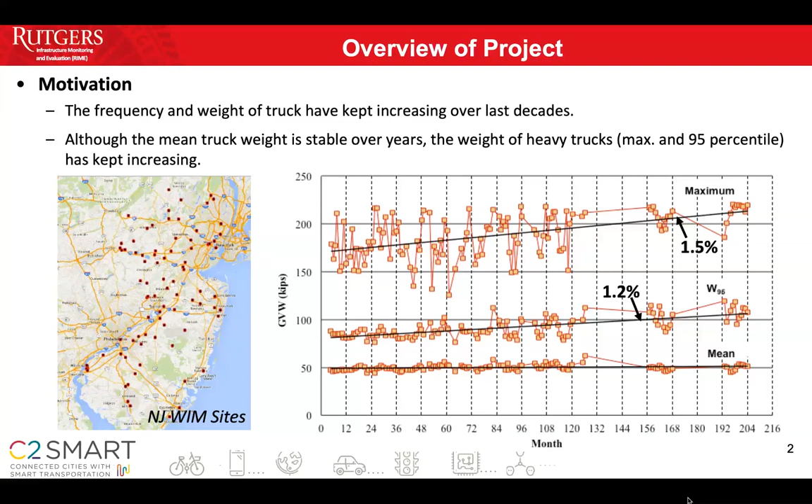The background of this project is that truck weight is important for the safety of people and cars. We have been collecting and processing WIM data in New Jersey over the last 10-20 years, and what we noticed is that the average weight of trucks is almost the same, as you see in the figure. The mean value is almost not increasing over the last couple of years, but the maximum value, or the 95th percentile of weight, is increasing over 1 or 1.5% every year. This is a lot, so we have to know how these overweight trucks are impacting our infrastructure.

Another thing is that overweight trucks are normally regulated by weighing stations. In New Jersey there are a couple of weighing stations, and the troopers try to enforce them weighing at the station. However, they have captured less than 1% of overweight trucks, but in reality, when we processed all the WIM data, we found that more than 6% of trucks are overweight. So there is a big gap between the actual overweight and what is being cited at the weighing station.

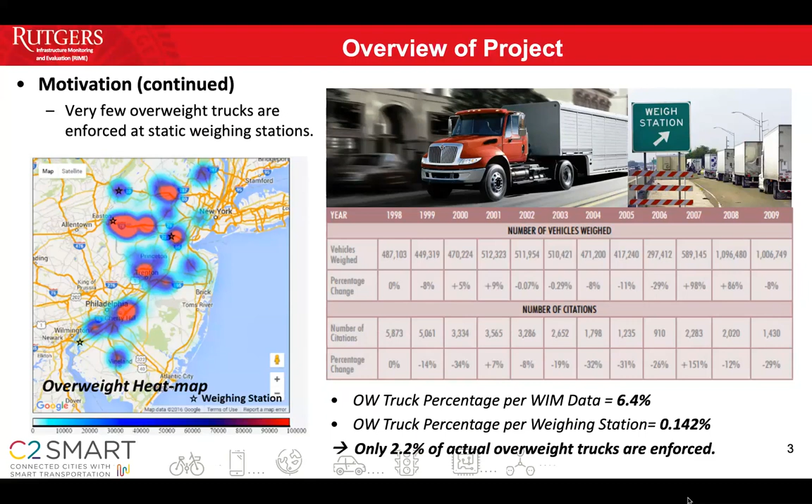For this study, we had previous work in New Jersey called the Impact of Freight Effect on Infrastructure in New Jersey. Based on that research, we expanded to New York City, and we are going to share those results in this presentation. First, Graziano will present one part of the research.

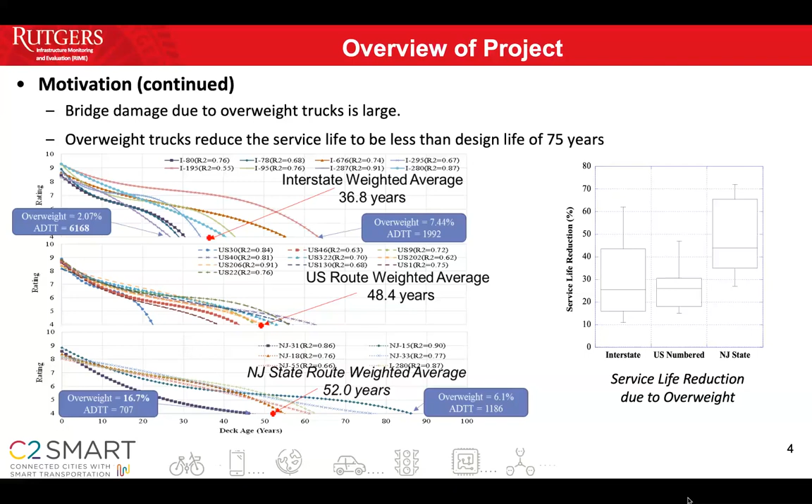Related to the impact of freight, generally there are two types of components that are analyzed: one related to roadways or pavements in structural terms, and bridges, the structural integrity of the bridge itself. For these two systems, there are different approaches because they are physically very different. For pavement, generally there are two approaches that can be used.

One is... I think there's some echo. Can you hear me well?

Related to this, the methodology was developed in the 60s, called ESAL, or Equivalent Single Axle Load. It's an empirical approach where the Federal Highway Administration created methods where they ran trucks over certain specific pavements and measured the effect of different loads on the pavement. Based on that, they created a regression, as you can see in that exponential curve, in order to quantify the effect based on the damage onto the pavement. This was a very simplistic approach, but because the physics of the pavement is very complex to model, that was the only way to provide a methodology for engineers to quantify load effect on pavements.

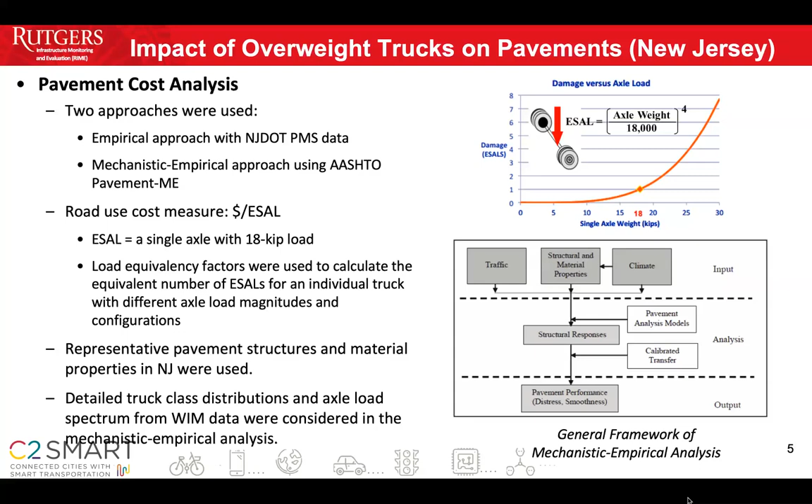In our case, we developed for the New Jersey project a method based on MEPDG, the Mechanistic Empirical Pavement Design Guide, that uses this information, as you can see in the lower chart, with traffic characteristics, material properties, and climate. With this information, we simulate, using the load, a response of the pavement package. Based on this performance, we measure the deflection, and this is used to quantify good or bad performance related to the service life.

When we have a model related to a single segment, we can try to extrapolate this effect all over the networks in the state, nationwide, related to roads and bridges.

In this case, we have a scenario where we analyze a specific segment of pavements related to certain paths. For each of these links, we know the characteristics of the pavement, and we quantify the ESAL. Based on the cost to repair the pavement and the cost related to the effect of the trucks, we can quantify how much it would cost to repair the pavement based on the characteristics of the actual trucks we see on the highway. We can do this when we know the effect, when we know where the trucks are traveling.

For instance, in New Jersey we have a database of trucks known to be overweight, which require a permit because by law you're required to ask for a permit if you know you're running overweight. Based on these characteristics, they store this information in the database. Using this data, we can quantify how many of these trucks are traveling on the network and what the effect is on a yearly and monthly basis.

We estimated a range based on the effect of these trucks on cost, between 2 almost 3 cents to 5 cents for interstate, and for state roads almost 10 cents to 50 cents. On average we have 4 cents and 25 cents.

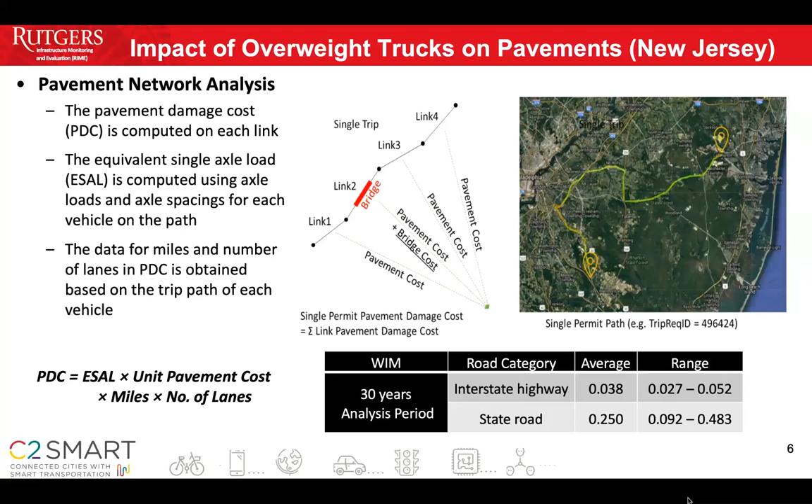To perform this analysis, we had to assume certain parameters because the pavement databases and cost information vary across the state. City by city and region by region we can have different cost information. Based on this, we collected what was available out there to evaluate the pavement cost damage.

What we developed in New Jersey, we tried to tie to New York City. Differently from New Jersey, in New York City there is no database of trucks where we can infer the patterns of these trucks. We don't know the weight related to overweight trucks unless we measure directly, since the DOT doesn't track this information yet. Because of that, it was more challenging to perform the same type of analysis in New York City.

So we tried to assume whatever would be similar between the two geographic regions. For example, New York City and New Jersey share the same environmental and climatic conditions, so those assumptions were fairly good relative to what we had in New Jersey.

For the trucks, we had to measure them in the city, and there are only about 3 sites where we could collect data, which is definitely not enough compared to New Jersey, where we have almost 90 WIM sites to collect truck traffic data. The pavement construction information is similar between New Jersey and New York City.

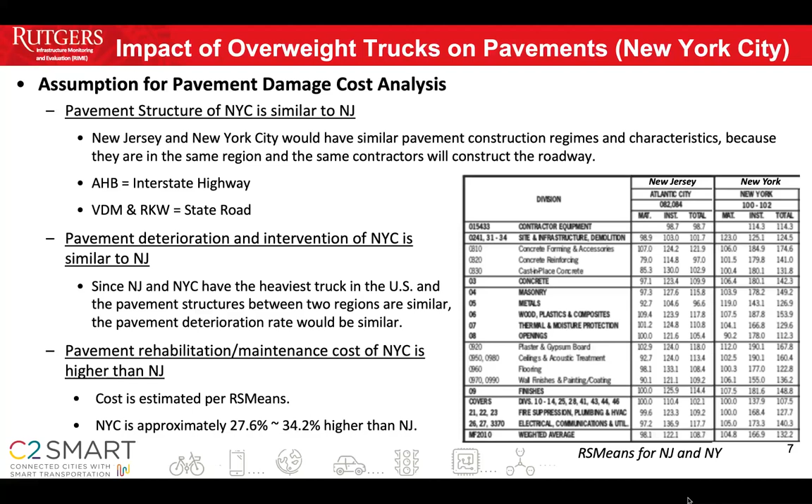For bridges, the effect is completely different, so the way we model bridges differs from pavement. We have a different physical model, a different mechanism of failure, mainly overstress or fatigue, tied to the effect of deterioration that generally tends to accelerate the risk or probability of failure related to either overstress or fatigue.

We have different types of bridges. The most common in the northeast United States are steel girder and concrete bridges, mainly steel multi-girders, though there are also different typologies for steel bridges. We clusterized this information according to their characteristics, and based on the statistics of the bridges, we analyzed a sample for each bridge type to come up with the deterioration profile for each component, like the superstructure, divided into deck and overall superstructure, and the substructure, which contains piers, abutments, and foundation.

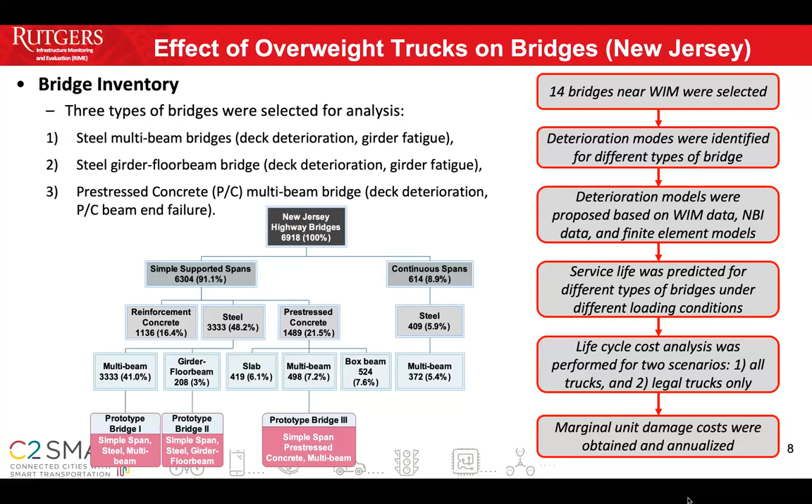And then we develop a methodology that tends to filter the data to perform, based on the statistics we have on the inventory of these bridges, deterioration profiles, so that over time tend to reduce the condition of bridges, and then we can extrapolate the behavior on the long term.

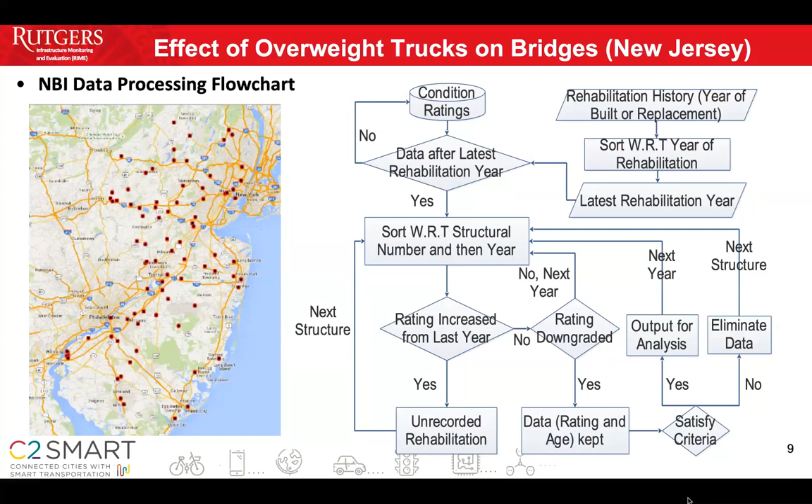And these are just examples of the deterioration profile for different types of highway bridges, like interstate, where they have high traffic frequency, and then US numbered and local road and state. On average, you have these red spots that indicate the life. So for the interstate, we have an average of almost 40 years for the deck. That is fairly correct, because generally federal highway requires changing of a deck every 40, 45, 50 years, depending on the condition, and this tends to increase as we move to less traffic roads.

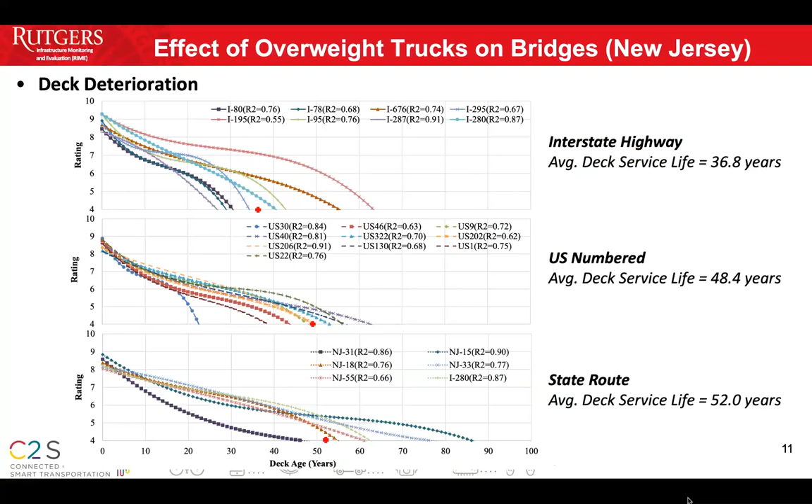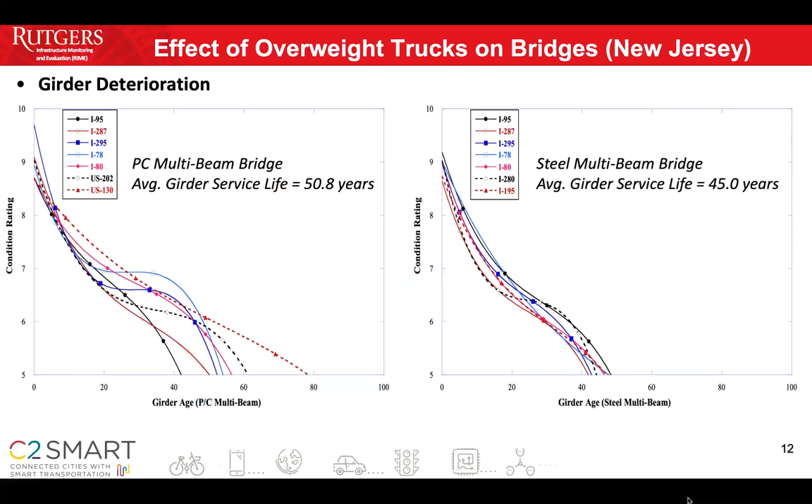Again, other different, similar type of curves of the deterioration profile, but just for the superstructure and the girders of steel and pre-stressed concrete bridges.

Then we have specifically in New York the location of the WIM site, where we had information about trucks. So we had three, as I said before, points of collection: one is the Alexander Hamilton Bridge, in Van Dam, and in Rockaway, so near the airport.

As you can see from these statistics, we have a very high average on the Alexander Hamilton Bridge, with almost more than 10,000 daily truck traffic per day, and the percentage of overweight that is close to 10%.

If we go to less traffic roads like in Van Dam and Rockaway, we have a lower frequency of trucks, but we can see that we have a higher percentage of overweight.

So generally, truckers know where the WIM locations are on the interstate, and they try to avoid these, going to secondary roads like Van Dam and Rockaway.

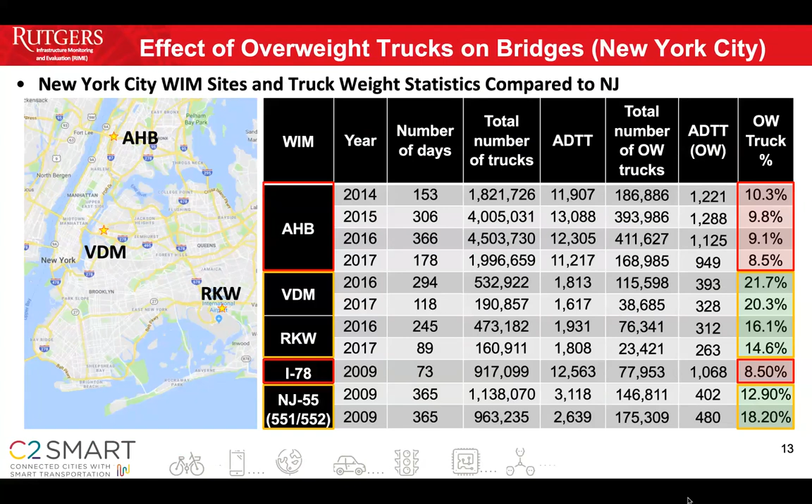So again, example of the data that we collected for bridges that we analyzed, in order to characterize the same type of deterioration profile in the city at each location, to tie the effect of the truck motions or the traffic to the deterioration of the bridges, to see if there is any correlation.

So you can see we have an average value that we obtain from these bridges that were shown on the map, and we can have an average expected life to reach a value of 4, which is a condition that the Federal Highway requires to provide an intervention on the deck, or basically to replace the deck when we reach that value.

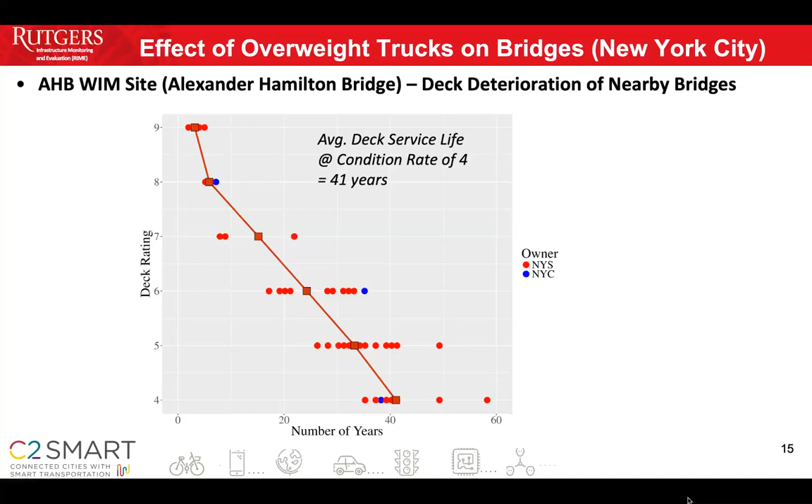So the minimum value that we can expect to see on the life is 4. Although it can go below, generally at 4 the Federal Highway requires you to rebuild the deck or any other element like superstructure and substructure.

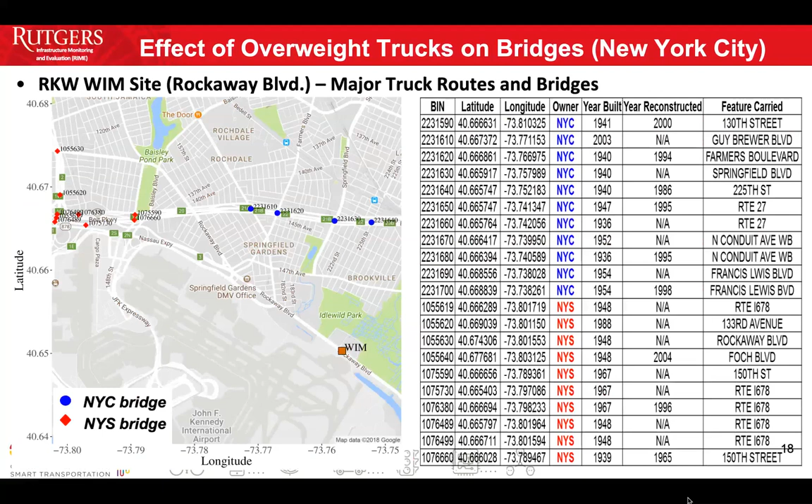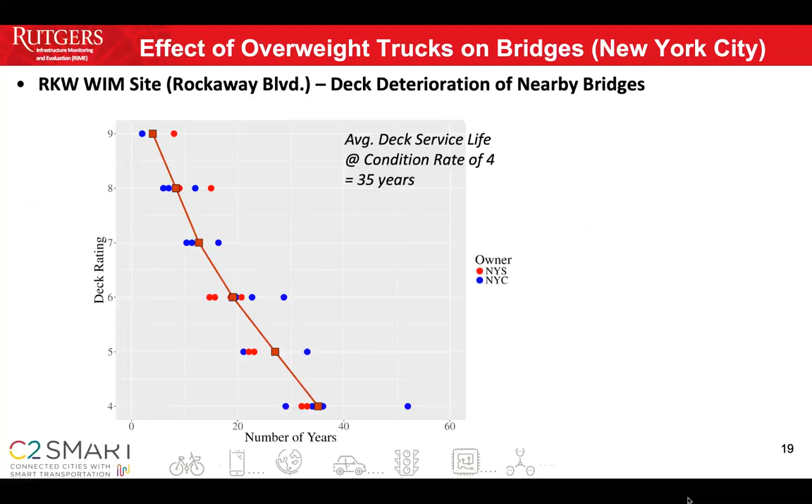Right, so previously we were discussing the service life of the bridge and the pavement. Now we quantify the service life into the cost. So this is a typical cash flow diagram for the bridge life cycle cost or the pavement life cycle cost.

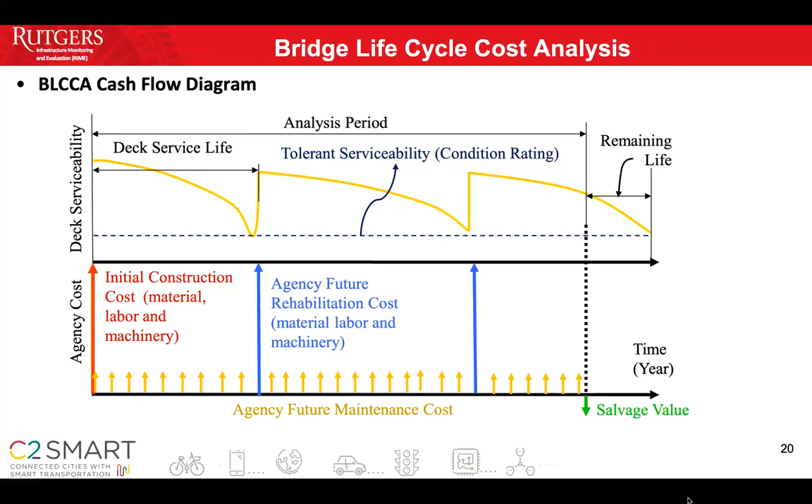We have the initial agency cost, and then annually we have the maintenance, and after the condition was downgraded to a certain point, we need to upgrade or rehabilitate those bridges or pavement at a certain time. Then we break all those costs into a uniform equivalent annual cost to get the annual cost.

Attributed by the overweight, we constructed 2 scenarios. Case 1 is the all-truck scenario representing the current traffic with all the overweight trucks, and case 2 is the base case, which consists only of legal trucks, meaning the service life only under legal trucks. But case 2 is an imaginary scenario.

Luckily, in New Jersey we have 93 WIM sites all over the state, and some of the bridges near the WIM sites barely see overweight trucks. So that could be a baseline or benchmark for case 2.

And Gazena has talked about how we get the service life for case 1. So here are also some assumptions: the analysis period we use is 75 years, and the discount rate is 3%.

We don't consider the annual maintenance cost at this point, but we assume they are the same for both scenarios. The deck replacement cost is $600 per square foot. This is the data given by the New York City DOT, and we assume the traffic increase is 1.5%.

Of course, at a certain level it won't increase all the way, so we have a threshold of the maximum truck traffic, which was specified by AASHTO. We assume when truck traffic reaches that point, it will stop increasing.

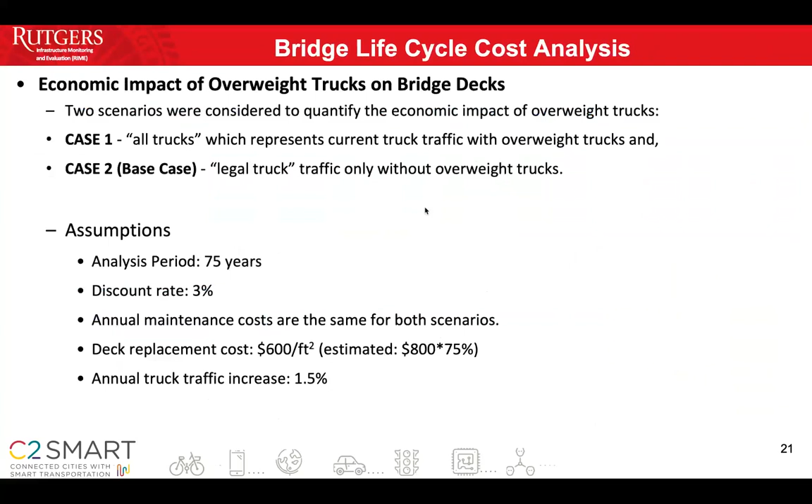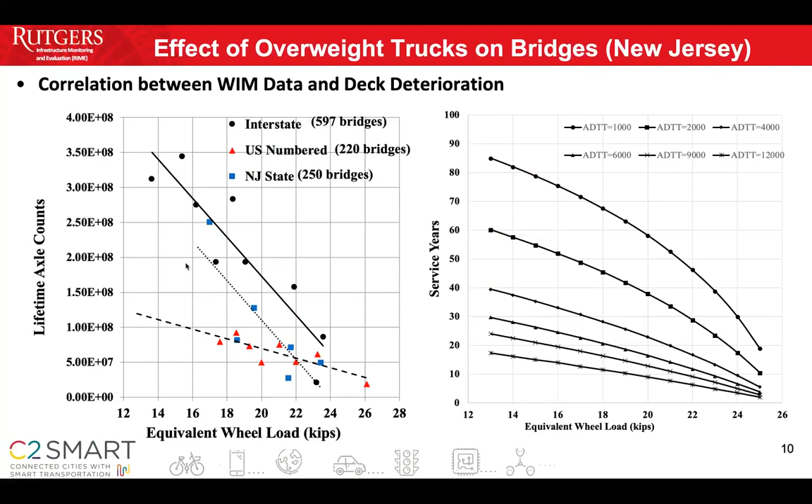Based on this semi-empirical, semi-mechanical model, we can know, given the truck traffic, how much life you will have. Using this chart borrowed from New Jersey, we get the service life reduction, shown in the fourth column, and using that reduction along with the real service life from case 1, we can back-calculate case 2. I know this is rough, but it's the best we can do for New York City, since we don't have much WIM data.

For each case, we calculate the EUAC, the equivalent uniform annual cost, for case 1 and case 2, subtract them, and divide by the total annual tonnage crossing that bridge. This gives us the cost in terms of dollars per ton and per deck square foot.

Looking at this chart, the bottom box plot is the New Jersey cost for interstate, the second is for U.S. numbered routes, and the third is for state routes. Based on all the assumptions and data we have, New York is way higher than New Jersey in terms of damage cost.

In the middle, we have a simple, quick example of how we implement these damage costs. If we have the unit cost and know the tonnage of the overweight trucks, and this truck is crossing, for example, a 60-foot-long and 120-foot span with a total of 5,405 square feet of deck, we can calculate a single trip cost.

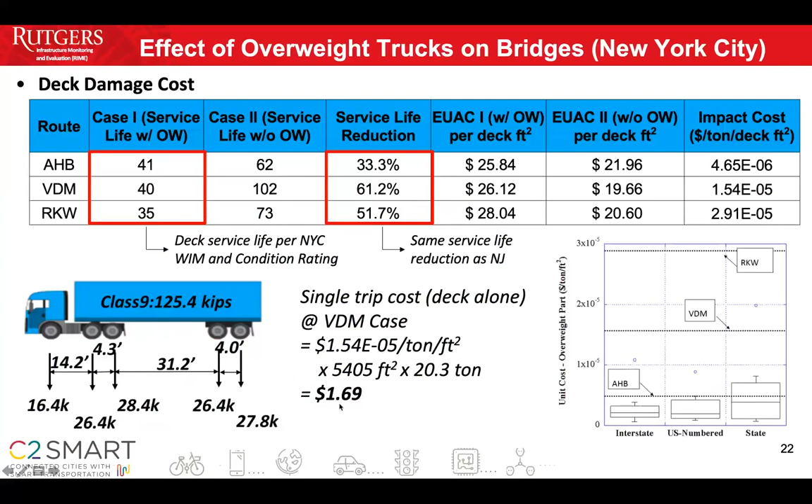This pretty much covers the current stage of the study. So we have a summary and conclusion. After this, Chico can talk about the implementation of the high accuracy WIM system, but I'm going to go through this first.

Monitoring the impact of overweight trucks on infrastructure in New York is challenging because of the lack of adequate data. We don't have many WIM sites, only 3 WIM sites to cover all the areas.

The current condition and construction cost of the pavement project were not readily available, so assumptions were made. We need these assumptions to proceed with the analysis and get a quantitative result, making sure the damage cost is in the right magnitude.

The current approach for estimating unit pavement damage costs in New York City and New Jersey assumes the pavement structure and deterioration characteristics are the same. For the next step, we're going to get more pavement deterioration data to keep updating our model and make the result more accurate.

The fourth conclusion is that current analysis of New York City is limited to only 3 sites. So right now we're working with New York City DOT to install more WIM sites, to expand the data set to have a more comprehensive result.

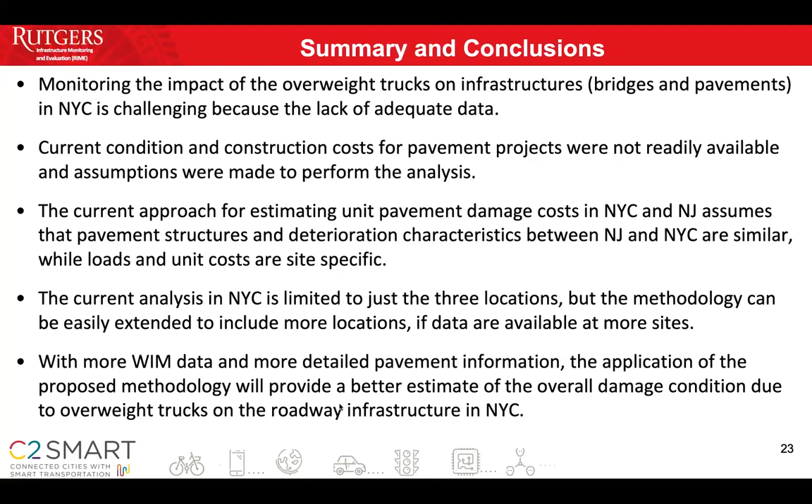With more WIM data, we will have a better estimation of the overall damage condition. After our work here, we are trying to implement the advanced WIM system, a highly accurate WIM system, in New Jersey or New York City, in order to supplement the data needed for additional analysis of pavement and bridges. So I just want to give a small presentation explaining the system sensors that are on the market and how we are going to proceed in the near future.

First is about WIM sensor technologies. There are a couple of different types of WIM sensors. The most popular is the PVDF sensor, a piezoelectric sensor where mechanical pressure is converted into electric charges proportional to the weight. This is a very cheap sensor and is easy to handle. However, cheap means low accuracy and also short service life.

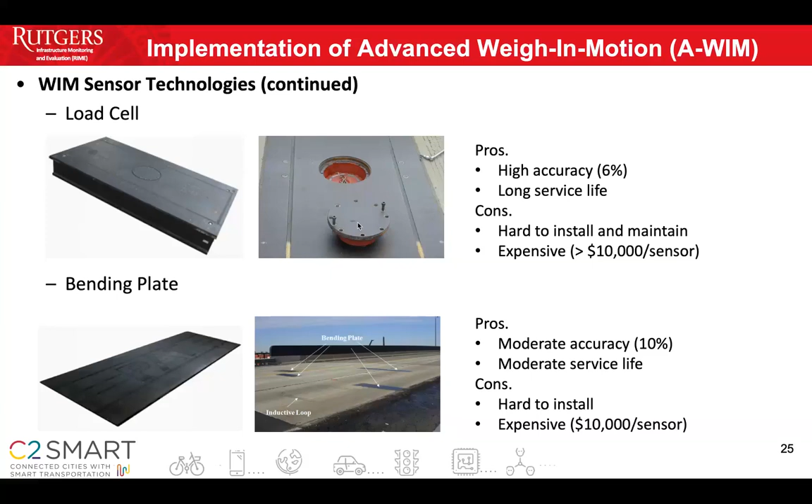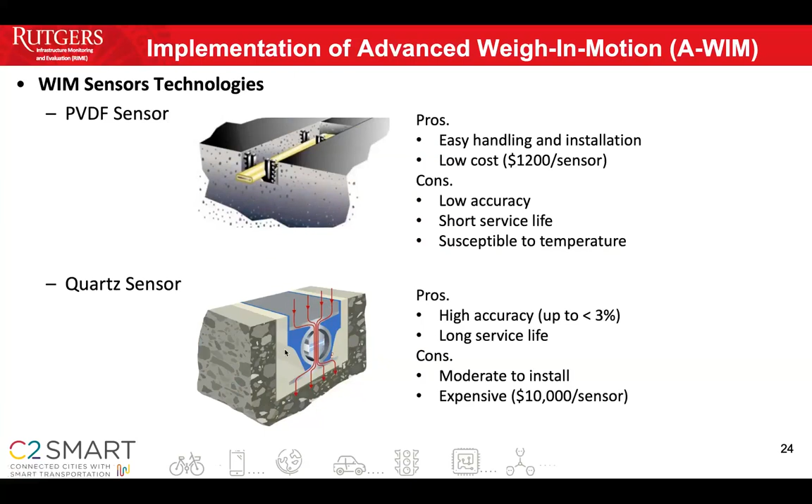Among those sensors, load cell, bending plate, and PVDF have been used widely, and recently, for accurate systems, people are trying to use the quartz sensor for easy maintenance and relatively low cost compared to load cell or bending plate.

In terms of system, European countries have many vendors who develop this new system. Czech Republic has systems, and the UK also has systems. Czech actually has two systems, CrossWIM and UnicamWIM, providing good accuracy, like gross vehicle weight up to 5% using quartz sensor, and they are flexible to implement other types of systems together for research purposes, and have been used for enforcement in each country. IRD is from Canada and is also almost in the US. They also provide this type of enforcement-enabled system, but they don't provide the accuracy figures. Other WIM systems offer like 5%, 3% gross vehicle accuracy, but they don't have that as of now.

On the right side, you can see how the system looks. More or less, the systems are like slot type, 19-inch rack, and they can expand the slots depending on the number of lanes or application.

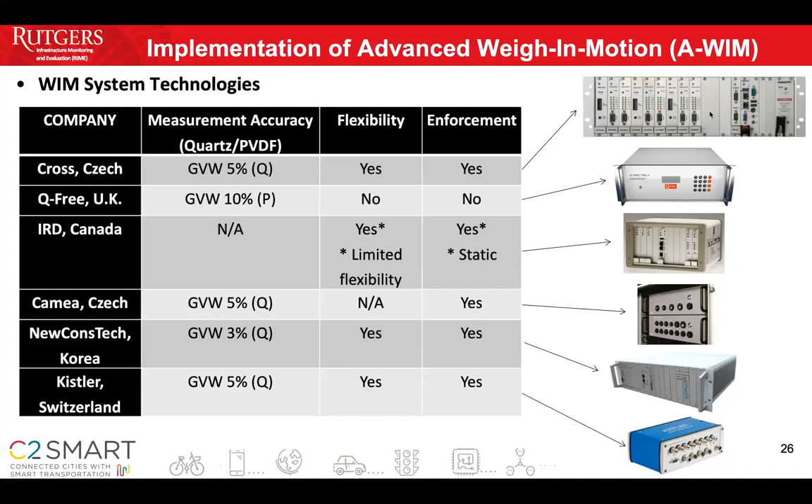Within this system, there have been some enforcement implementations in different countries, not in the US. There is one in Indiana DOT, with one site implementing this type of WIM system. I don't have the detailed information, so I cannot present it here. But one example is South Korea, which has 3 WIM sites with this high accurate WIM system for enforcement.

They have 2, 3, and 4 lanes depending on the location, and have implemented the quartz sensor with a piezoelectric sensor to track the position of the truck to improve accuracy, as well as a loop sensor to identify each vehicle, and a thermal sensor to check the temperature differential between top and bottom of the pavement. Based on their study, the initial results of the calibration truck showed error up to 10%, but they were able to update the data to minimize the error by implementing the location of the wheel within the lane, and checking the temperature differential between top and bottom.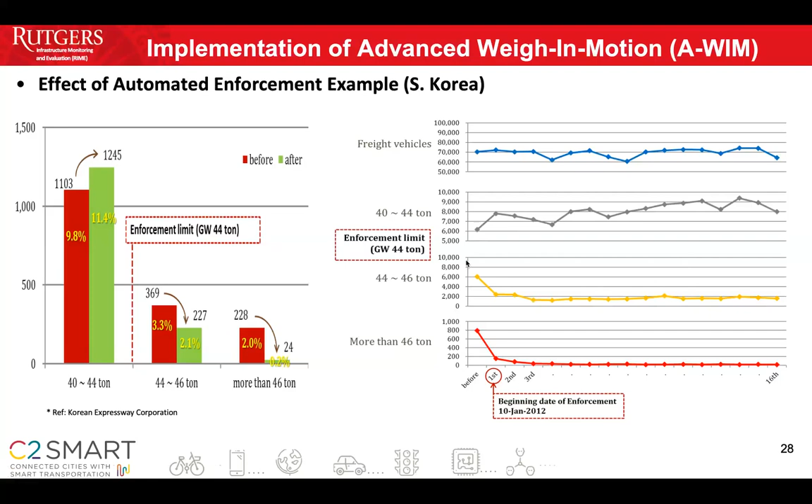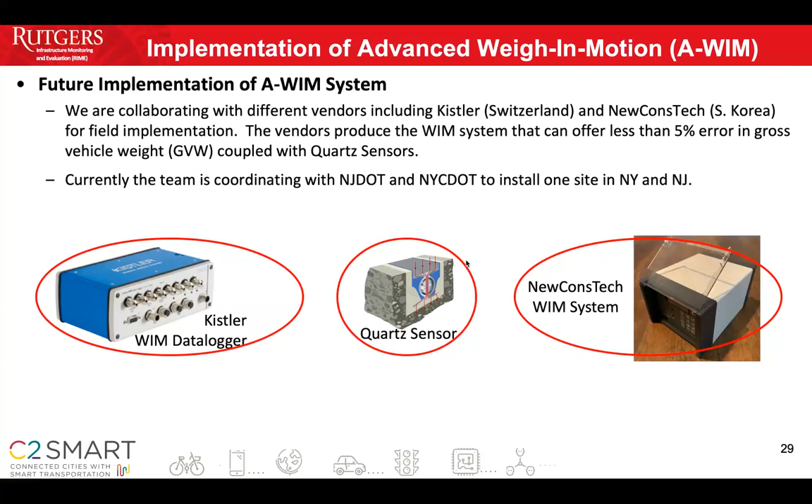So for this implementation, we are trying to do some kind of implementation in New Jersey. We are currently collaborating with different vendors, including Kistler and their WIM Datalogger, or the NewConsTech WIM system, for field implementation. The vendor produced a WIM system that offers less than 5% error in gross vehicle weight, coupled with the quartz sensor. We are trying to do implementation in New Jersey or New York with NJDOT or New York City DOT. This is about the potential configuration of the advanced WIM system.

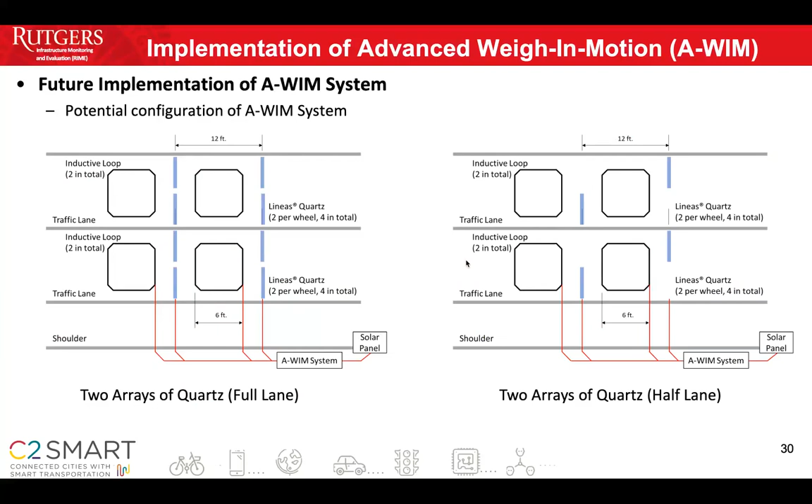We will use the quartz sensor. The left configuration shows the full lane, meaning we have 4 sensors per lane, and each axle will be measured twice, and each wheel will also be measured twice, so if you average them you get a better result. On the right side, if we are limited by budget, we use half a lane, measuring only once per wheel but twice per axle. So the accuracy on the left is better, and we are trying to implement the configuration on the left side.